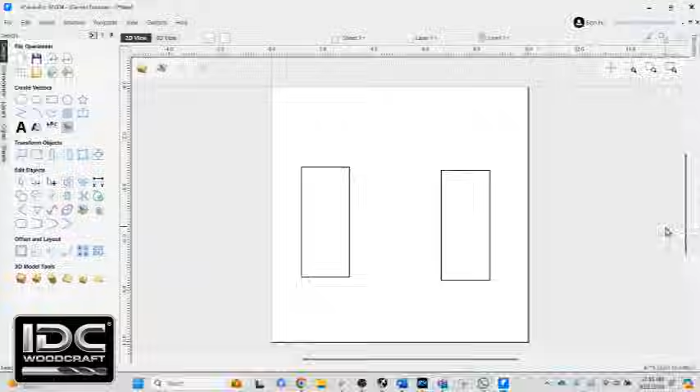So we are getting into Vcarve Pro, and you see in this project I have two rectangles. What I'm going to do is create keep-out zones, areas where the router bit needs to avoid as it moves around cutting out these projects. To set the stage, in the upper left corner is my start point - this is where the router bit home position will be when it starts, and the toolpaths will generate from there, moving down to cut this rectangle and the other rectangle.

So what I need to do is get over to the toolpath area, and the way we do that is by coming up to the upper left next to the word Design and clicking the little arrow pointing to the right. When we click that, the toolpath menu opens up.

Now what we're going to do is a simple profile cut around these rectangles. A profile cut is basically the router bit following a profile or a line. We have two rectangles, so we'll use this image here that says IDC Woodcraft - that's a rectangle, and we're telling the software to simply cut around the profile of the rectangles. So this has no keep-out zones in it.

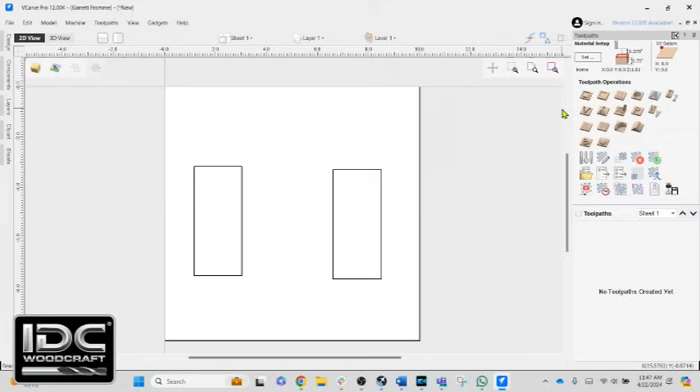Now I'm just going to start this off with a basic toolpath to help you understand how this is going to work. So we're going to go into the profile toolpath, which is right up at the top - it's the very first icon. When you hover over it, it says profile toolpath.

Select that and the menu opens up, and that's where we set up all the parameters for the profile. Up top it says start depth - we're going to start at 0, or the top of the material. The cut depth is 0.75, which is cutting all the way through.

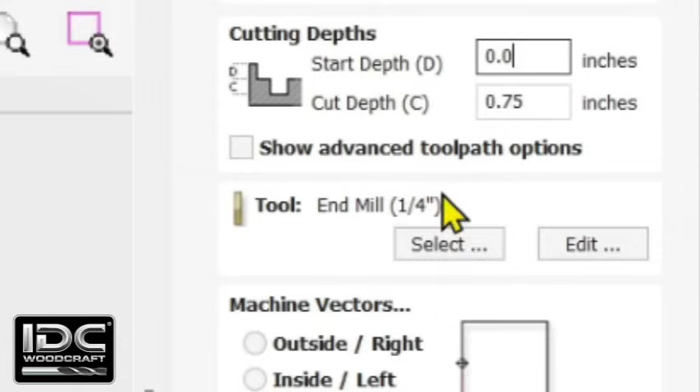Now you may have more things in this entire menu, and that would be because this checkbox says 'show advanced toolpaths.' When we click that, you'll notice more stuff shows up in the menus, but I'm going to turn that off for now just to keep this a little clean.

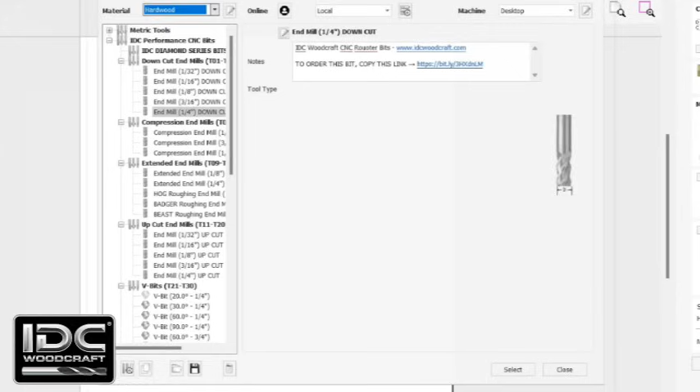Now we need to set up our router bit. We are going to go with a 1/4 inch end mill, so I don't need to add one, but if you need to add one or change it, just simply select the Select button. The tool database will open up, and then you can select your router bit.

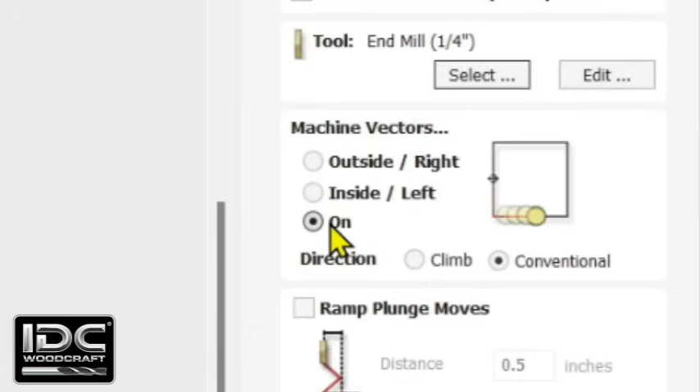So we're going to leave it just on the line, and we're not going to do any other settings. Down at the bottom it says Profile 2. Normally we would rename this toolpath, so we'll just do it because it's good to stay in the habit, to rectangles, and we'll call it the tool. So it's a down cut, 1/4 inch down cut.

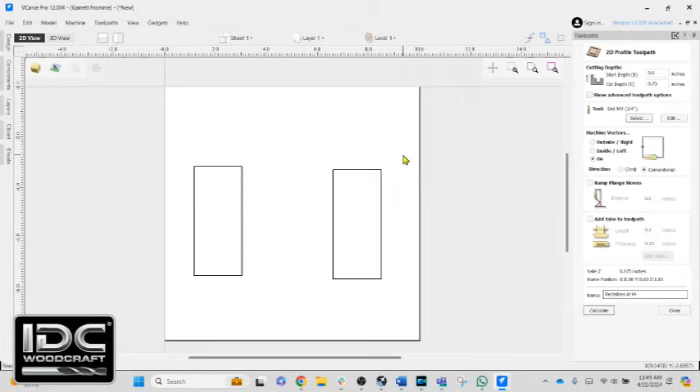And we need to select the two rectangles. So I'm going to hover up to the right somewhere, hold my left mouse button down, and select both rectangles. They are now selected, and you see these little green corners pop up.

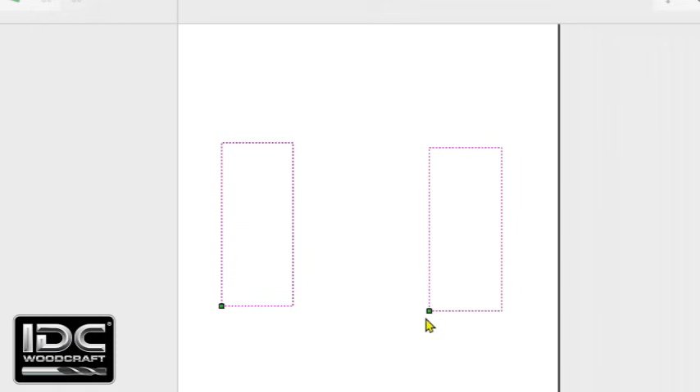These are where the router bit is going to start. So what we have at this point is my start point is at the upper left corner, and then the router bit will start from there, and it's going to draw a straight line down to this bead right here, and then it's going to make its profile cut, and then it will move over to the other bead and do its profile cut. Let's calculate.

And there we go, I'm going to reset this preview. So there's our toolpath. Now, one of the things with the Vectric software, normally in the older versions, in order to rotate this project around like this, you would hold your left mouse button down, but that no longer works. You have to do it with the right mouse button.

But here is a new feature they have added. It's this little toggle box at the upper right of the screen, where when I hover over it, the different triangles of the box turn black, indicating that's the selected zone I want to rotate to. So when I'm hovered over this particular rectangle here and I click my left mouse button, the project is going to reorient itself in the screen just like that.

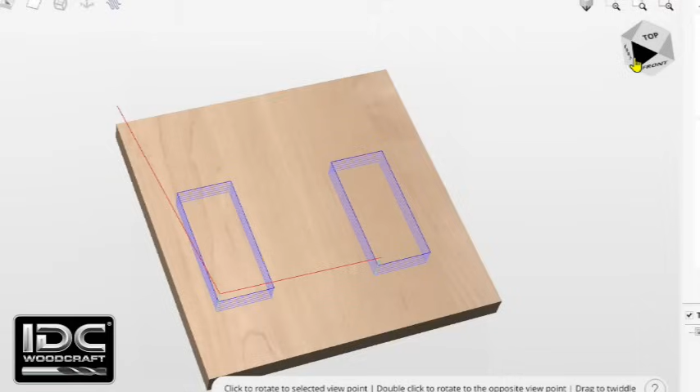Or if I click the one that says front, it'll show me the front. Or the other thing I can do is simply hold my left mouse button down and just pull on that toggle box to get whatever orientation I want. I'm going to flip back to the top by simply clicking the word top in this little toggle box, and we reorient ourselves.

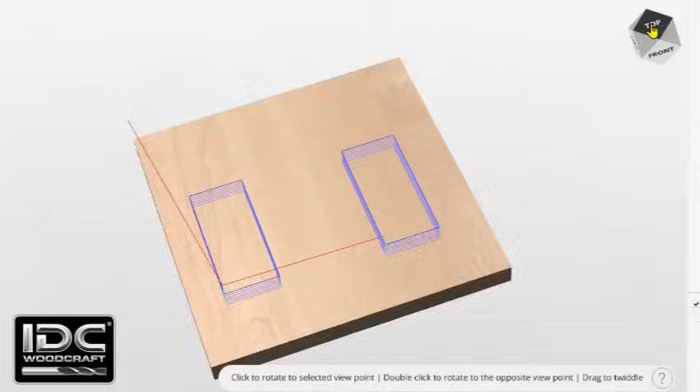Now you can see here, first of all, I'm moving this around by holding my scroll wheel down, straight down, and now I can pan around. But we can see the start point. This red line indicates the rapid motion of the router bit.

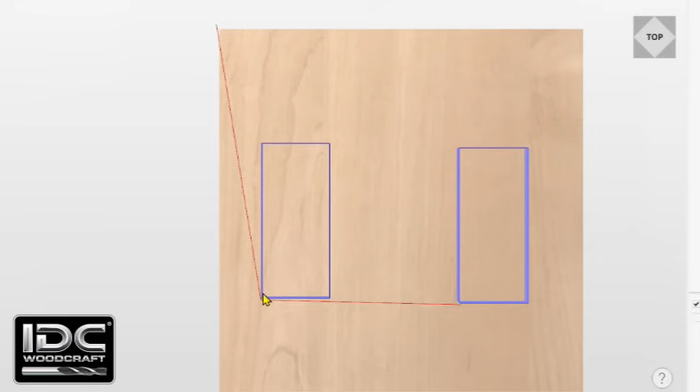So it's starting at the upper left corner of the project, and it rapids down to this lower left corner of the rectangle, and then it does all its cuts, which is all the blue lines there. And we can see it's going to make multiple cuts.

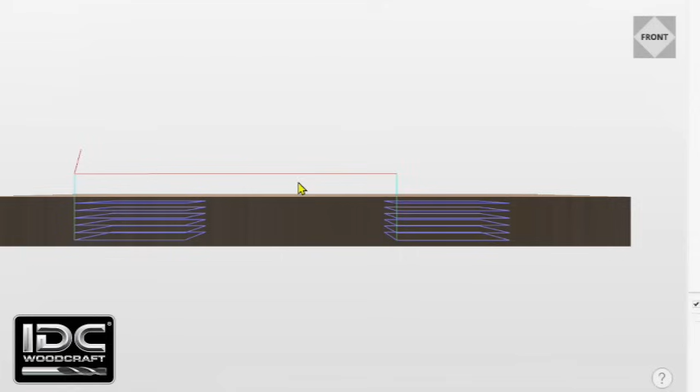I'm going to reorient this a little bit so you can see this better. And so all these blue lines are passes around that rectangle. It's going to do 6 of them, and then it will pull back out, and it's going to rapid over to the other rectangle, and cut that out.

Now you can see when I reorient to the top, it's going to go straight across. Now let's just pretend that I have some clamps in here, and I need to place them in the path of these motions, the rapid motions of this project.

Now, to be clear on what's going to happen here, you cannot put a clamp or a keep out zone in the middle of an actual carve area. So we got the profile cut around the rectangle. We can't put a clamp around that area.

That's an actual carve area, but we can put it where a rapid move is going to be, or where the red lines are going. So we're going to create some keep out zones.

Now here's one of the cool features that Vectric has added. We can actually do some editing in the 3D area instead of having to go back to 2D. Here's what I mean.

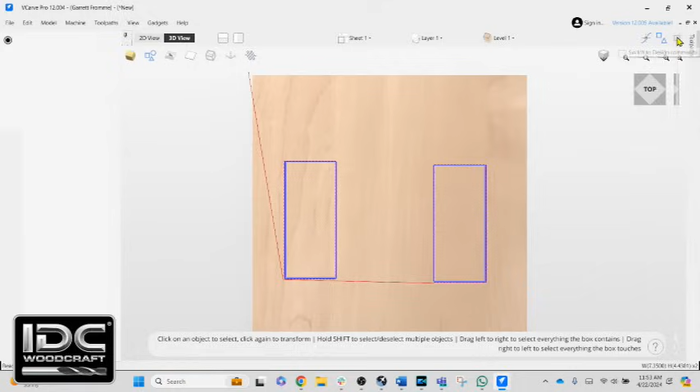First, I'm going to close this menu, and when we come up to the upper left, there's this little tab that says 3D and 2D, and 3D is highlighted black right now, which means we are on the 3D screen. If I go to 2D, we can see the 2D aspect of this screen as well. But I'm going to stay in 3D mode, and come back over the toolpaths and switch back to design. I do that by clicking this little arrow here with my left mouse button, and we get back to the design screen, but we are still looking at the 3D view of this thing.

Now let's say right in this area, right where the tool is starting to go to the first rectangle, I'm going to have a clamp there. So we're going to just create a simulated clamp. I'm going to select a rectangle and draw that rectangle. It'll just randomly draw.

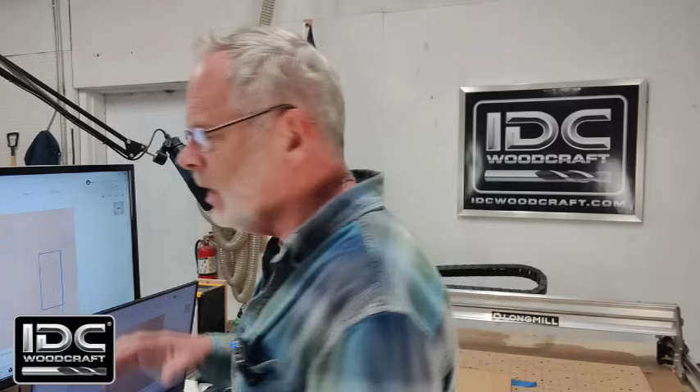Here are some new features in the Vectric software. As you can see, this rectangle has all kinds of stuff in it. I'm going to come back to this. First of all, we're just going to keep this as a keep out zone.

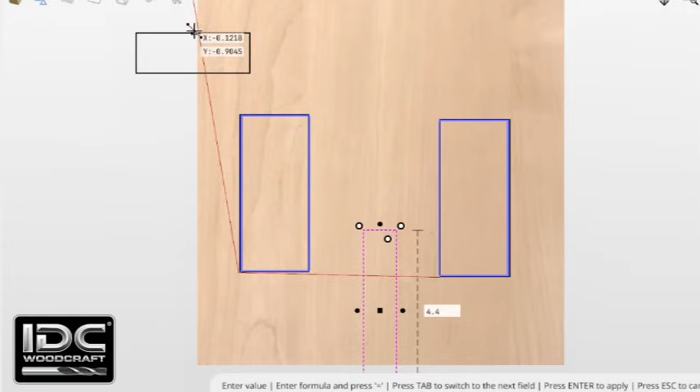Now let's say we have another rectangle or clamp right down here. So I know that in my design I'm going to be clamping the material in these areas, and these clamps are in the way of these toolpaths. You can see at the top, the red toolpath goes right through that clamp, and then when it goes across to the second one, it's going right through that one as well. So we're going to close this rectangle and switch back to toolpath.

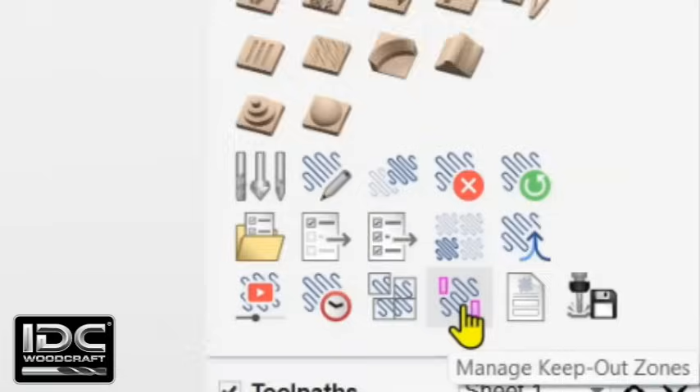Now in the Vectric software, they've added a new icon. Just to define these icons, all these brown icons are carving icons. The ones down below are management icons. We are going to go to the bottom row, the fourth one in. When you hover over it, it says Manage Keep Out Zones.

When we select that, this little menu comes up that says Manage Keep Out Zones, and we have this area that says clearance. Currently it says 0.5, but it will start out with 0, so I'm just going to leave a 0 there. And then it has two buttons, Clear Zones and Create from Selection.

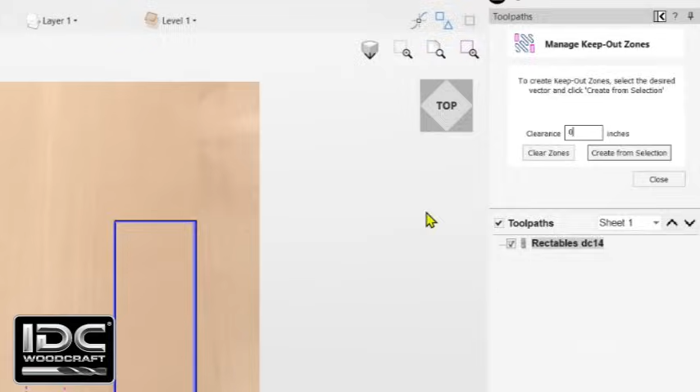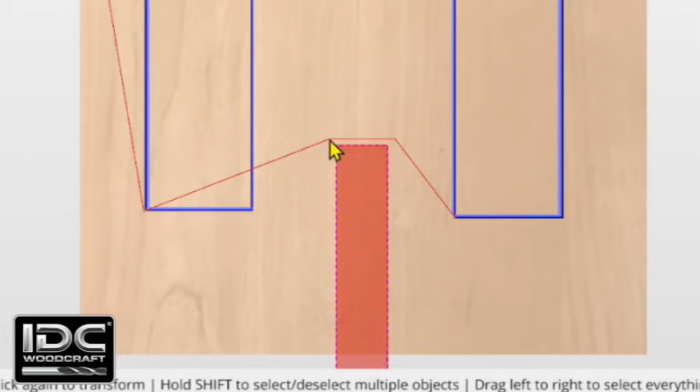So right now, if you look at the 2D drawing, there is the clamp that I created in the middle, between the first rectangle and the second rectangle. That is the selection. So when I click Create from Selection, it's going to create a red box. And you notice right away, in that red box, the toolpath that once went across to start the second rectangle has now changed its direction. It's gone above the red zone and then back down to that start point. So what this has done is immediately create this red zone where the router bit is not allowed to go, so it redirected the toolpath up and around it.

And this is how you will prevent breaking router bits. You have a clamp right there. You tell the software there's a clamp right there, and it will immediately redirect the toolpath up around it.

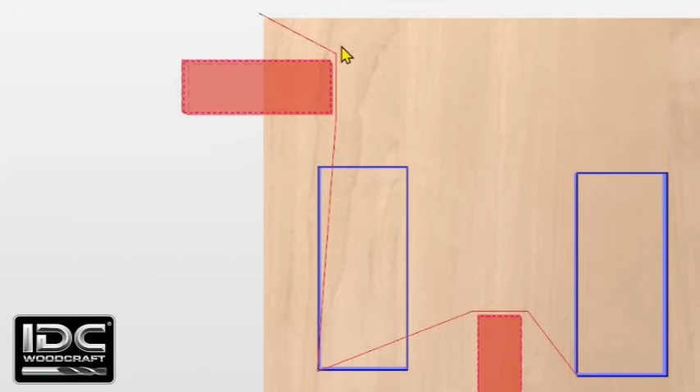So let's go back in and create a second keep out zone. I'm going to first just hold my shift button down and select the other clamp I've created that's in the way of the path going to the first rectangle, and click Create from Selection again. Created a second keep out zone. You can see the router bit has now gone around that, and then it goes down to the first rectangle. So you notice here that it comes relatively close to this keep out zone.

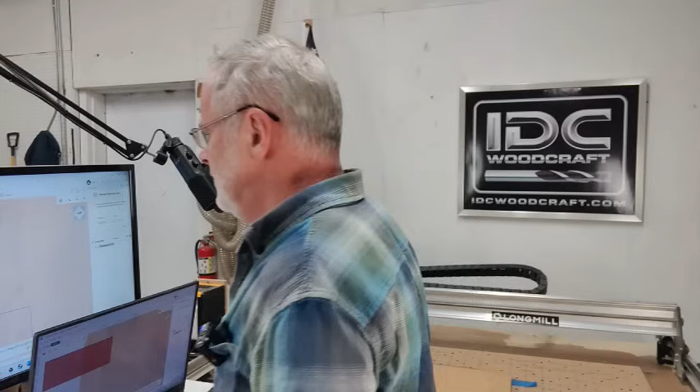Now let's say that this is the actual size of your clamp. Well, we are using a 1/4 inch router bit, and there's only a little bit of space where that red line goes around the clamp. Now, if that clamp is your physical clamp, the edge of that router bit is actually going to come right along the edge of the clamp. That red line is the center axis of your rotating tool. And then what the software is doing is taking into account half that diameter, and now it's offsetting that new toolpath by, in this case, 1/8 of an inch, which is half of a 1/4 inch tool.

But let's just say, because this is the size of my clamp, I want a little more space to come around that clamp. We can fix that real quick. This is what I mean right in this area. That distance from here to here is 1/8 of an inch.

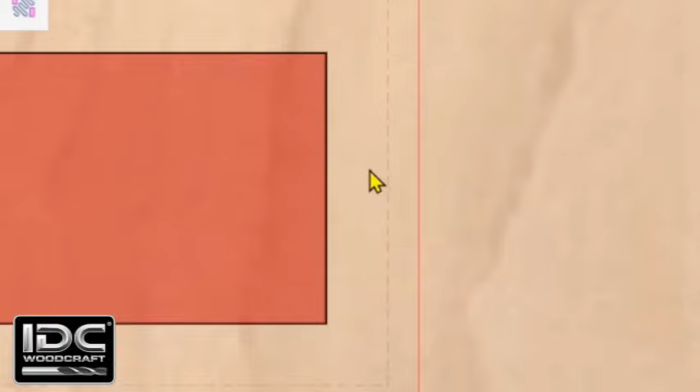So in order to get a little bit more distance around this clamp, we're going to come over to the clearance box and change that number to 0.125. What you'll see now is it has created this virtual area, the dashed line around there. That's a 0.125 inch distance right there.

It's also moved the tool path over by another 1/8, or half diameter, of the router bit. That has created a safety zone around the keep out zone, and it did the same thing on the other keep out zone. So now when I close that and generate my tool path, that's exactly what it's going to look like.

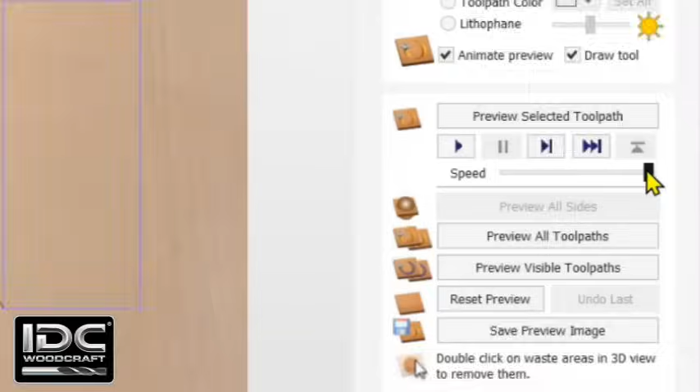So now let's regenerate the tool path, and we'll look at it by clicking this little icon with the movie image in it. It says Preview Toolpaths. Select that, and then we're going to slow the router bit way down. This little slide bar will increase or decrease the speed of the display. I'm going to show you what I mean.

We're going to click Preview Selected Toolpath. First, I'm going to get this project in the center of the screen. Click Preview Selected Toolpath, and it goes right in to start carving all this out. We can see that it is carving everything out.

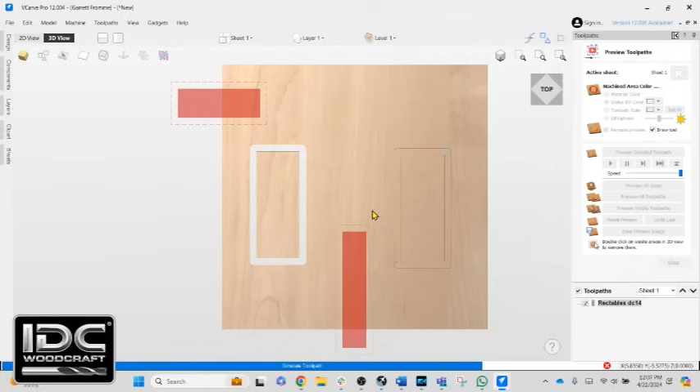Now I'm going to reorient this so we can see it a little bit better. We're going to reset the toolpath and then Preview Selected Toolpath again. And we can see the router bit running around.

Now, let's say you want to stop this regeneration because it's taking too long. Here's what you do, just a little extra tip. I'm going to reset this toolpath and set Preview Toolpath again, but first I'm going to bring the slider down so it runs a little bit slower.

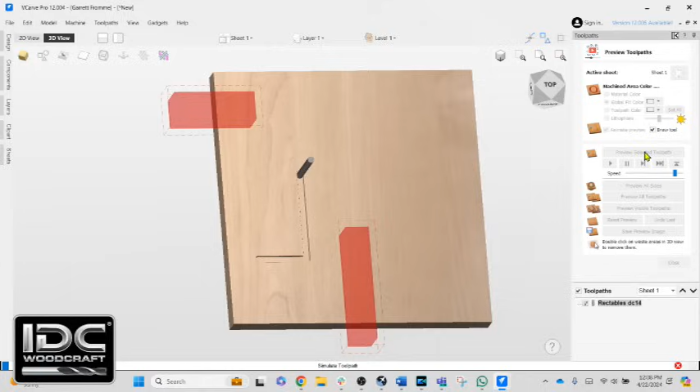Click Preview Selected Toolpath, and now the router bit is starting to run around. But let's say I just want to stop this from doing its thing. Down at the bottom, as it generates the toolpath, you'll see a blue bar expanding across the screen from left to right. If we want to stop the whole toolpath generation, there's a little red X at the right end of the screen. Click that and it'll stop the toolpath generation. So we'll click that, and it has stopped generating.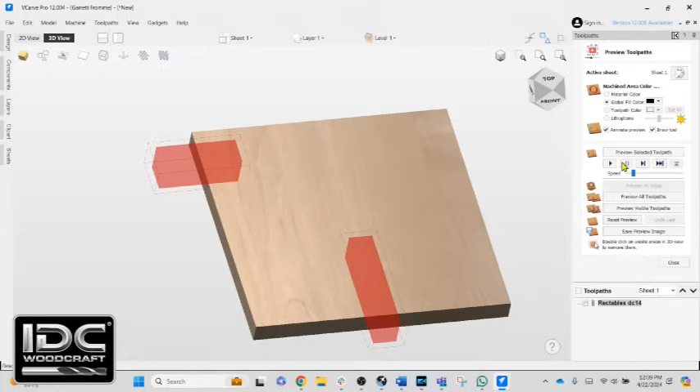So I'm going to slow this way down and see if we can actually see the router bit go around this keep out zone. Let's orient this a little bit differently, then reset, slow it way down, and click Preview Selected Toolpath. When you do a rapid, it does not actually show the rapid motion of the router bit.

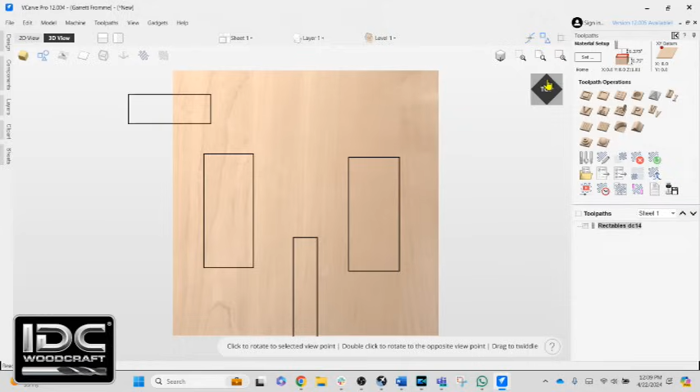So I'm going to click Stop again on this toolpath, reset the preview, and close that menu. Then reorient this to the top by clicking the little toggle box, clicking the switch on the top. So we'll click that, and there we go. Now we've got these two rectangles here, and we have our two keep out zones.

Now I've shown you all these features about the keep out tool and how to work with it, but there are limitations with it and things you can't do, and we're going to get into that in just a moment. But first I want to show you a very cool thing added to Vectric in version 12, which wasn't available in earlier versions: the ability to create your designs in the 3D modeling area and edit them. There are limitations in that as well, which I will cover. But this is a huge advance in the Vectric software, where now you can do a lot of your design work right there, generate your tool paths, modify your design, and regenerate them without having to pop back and forth between the design area and the tool path area. So we're going to get into that next.

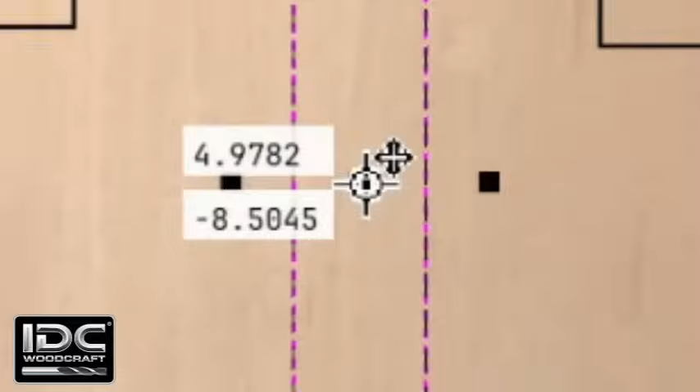Let's just say this clamp is the wrong size, this KeepOut zone, it's going to be a little bit bigger. What we can do is click right on the rectangle and click it again, and then these beads come up. Now, this is not something that was in the 3D feature in the earlier versions, 11.5 and earlier. Now, these beads enable you to make adjustments as you would normally be able to do in your 2D designs. For example, this little black bead right in the middle, you can grab that, hold your left mouse button down and move it around.

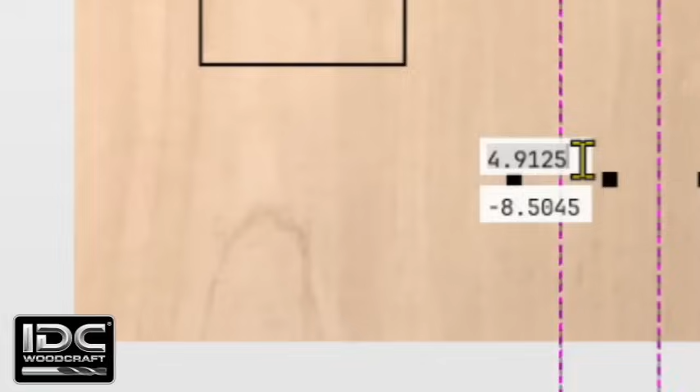Now you notice these little white boxes popped up. These are editing zones so you can change things. For example, the 4.9125, that's the X position of this rectangle from the center, from the left side of the project to the center bead. Let's say I want it at 5 inches. So I just highlight that, type in 5 and hit enter, and watch the rectangle when I hit enter, it's going to move just slightly to that 5-inch position.

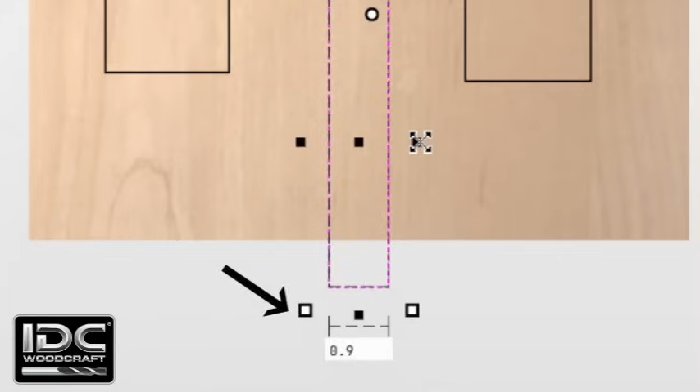So when we hover over these beads, these little windows are going to pop up. For example, the right bead, when I hover over it, you'll see the little box right down at the bottom. It says 0.9, and that's the width of that rectangle. When we click that, now we can edit that box. I'm going to change that to 1.0 to make it a 1-inch rectangle. When I hit enter, the rectangle is going to expand left to right to 1 inch. Click that, and now it's a bigger rectangle.

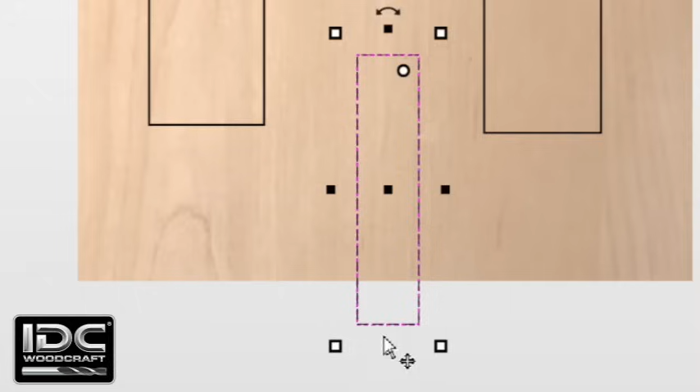And so this is another cool feature, and same thing with the dots below and above. You click that, and that's going to change the height of the rectangle. Right now it's 4.4, let's say it's going to be 5. I'm going to hit 5, hit enter, and now we have a longer rectangle.

The other cool features are this little bead, the white rectangle bead on the 4 corners. You grab that, and that's going to expand and contract in scale on your X and Y. Now, if I hold my shift button down and do that, it's going to do it from center.

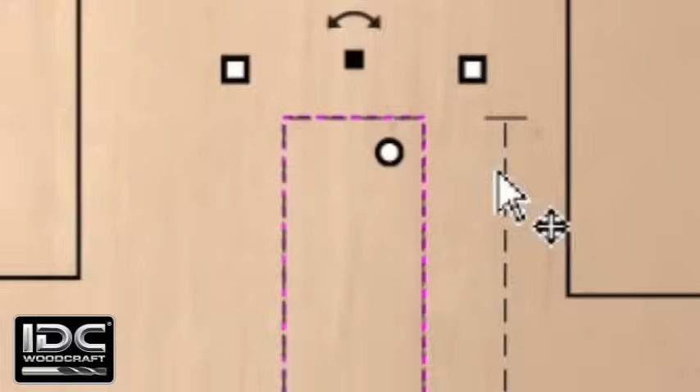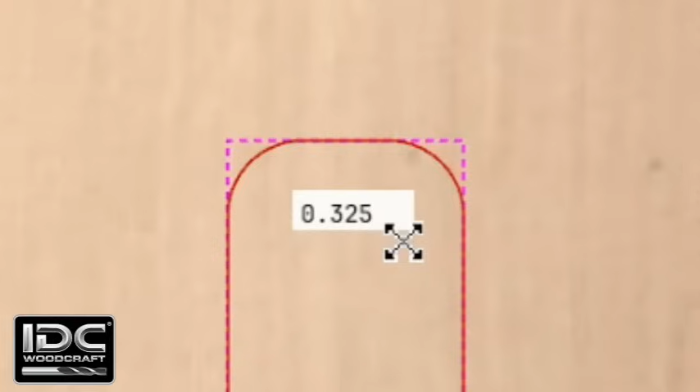Now, here's the cool feature that I really like, this little round bead. When you click that, now you have this 0 there. If I take that and hold my left mouse button down and drag it inward, now I'm creating radiuses on my rectangle. If I drag it outward, it's going to create inverted radiuses, just like that. And let's just say, oops, I didn't want that, I just wanted a square corner. I can go into that box, highlight it, hit 0, and that's going to return us to 0.

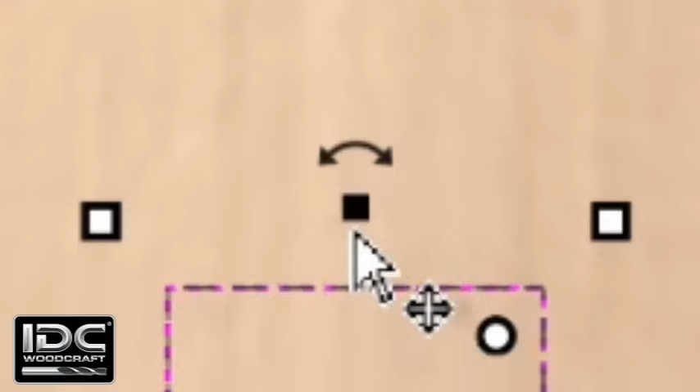And the final one is this little arc thing at the top. When you hover over that, your cursor turns into a little circle, that means I can rotate it around. I get this little box where I can change the angle of that. Let's go back to 0 - I didn't mean to move that, so I'm going to type in 0, hit enter, and now we are back to our rectangle.

Now, I want to make 2 points here. We've been altering a rectangle that we built for the KeepOut zone, but all these alterations - the radiuses, the concave corners, changing the angle, changing the size, changing the position - we can do that on any of your elements designed in the 2D side. You can do all this stuff in the 3D side for anything that you're going to be carving. So it's not just the KeepOut zones that need this edit, this is a feature you can do with any of your designs. Also, we have changed the size of the KeepOut zone - made it longer, wider, taller, changed the angle, and moved it.

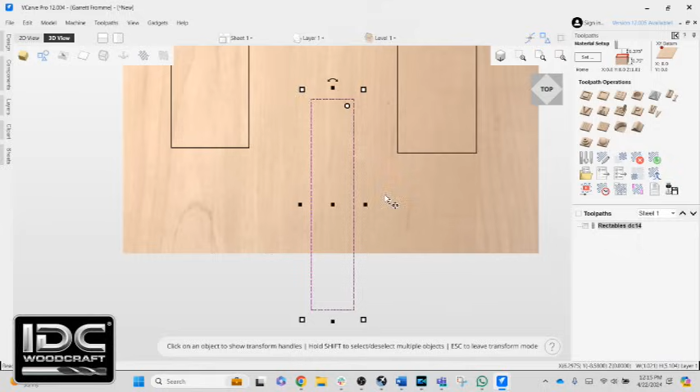We did all kinds of things. That means we have to go back into the KeepOut zone and redefine it. Here's what I mean. We are going to hit the escape button to deselect this rectangle.

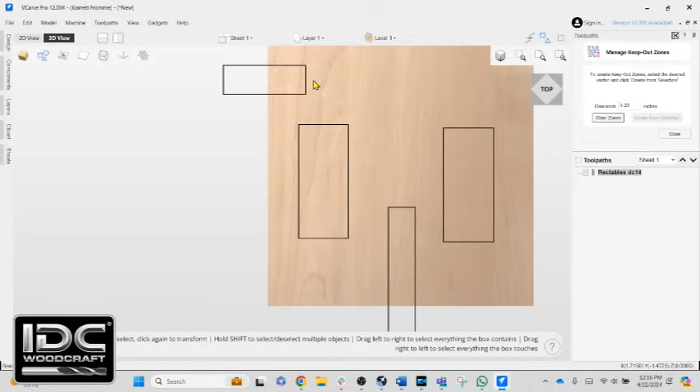We have to redefine the KeepOut zones. So we go back into KeepOut zones, and you notice now we've got this red here. That is the original rectangle size, but not the new rectangle size. What we have to do is clear the KeepOut zones and redefine them. So you hit clear zones, and then hold your shift button down if you have multiple zones, so you can select multiple ones. Then you click create from selection, and now we have new KeepOut zones. I click close, and we are ready to go.

By looking at the toolpath, we need to check the little checkbox under toolpaths next to that particular toolpath, which is rectangles, spelled 'rectables' by accident. Click the checkbox, and now you can see the router bit is going around that still.

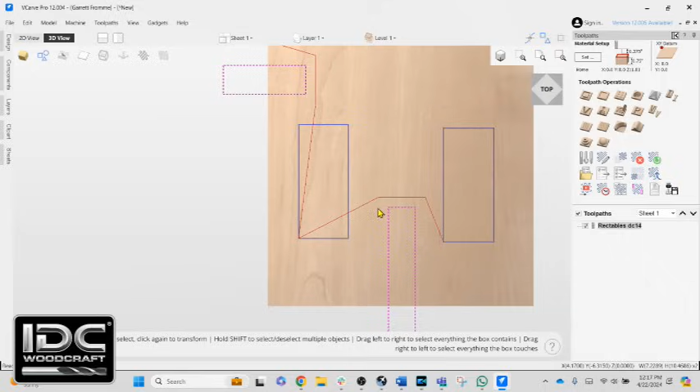Let's get into a little bit different thing about KeepOut zones. Let's say we have a screw we're using, so we want to protect around a round thing, a quarter-inch screw or whatever. I'm going to go back into the drawing tool by clicking the little arrow up in toolpath, and grab a circle, and we'll put this little circle right here so that it's in the way of the current toolpath. I'm going to close the circle command, and we'll go back to the toolpath area, and the circle is selected.

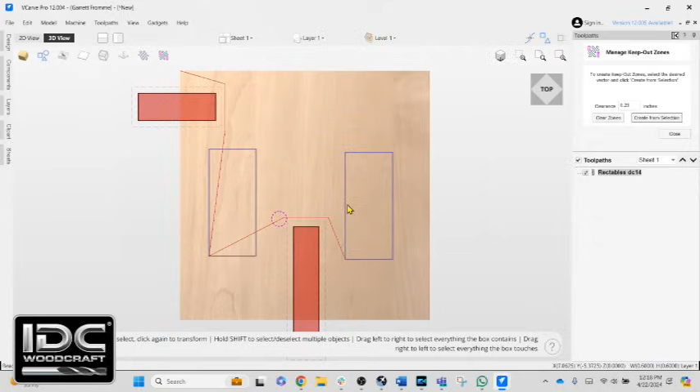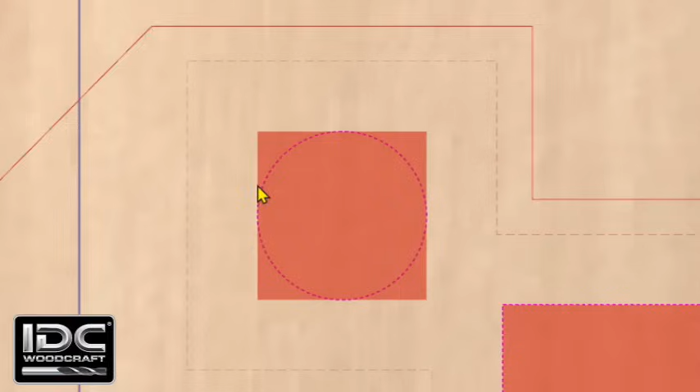We're going to go back to KeepOut zones, and deselect our KeepOut zones. No, we're going to clear the zones, and then select the rectangle, the circle, and the other rectangle, and click Create from Selection. And you notice on the circle, it is not a circle or round KeepOut zone, it's actually created a rectangle. This is the core KeepOut zone, and then it's created a rectangle around that KeepOut zone.

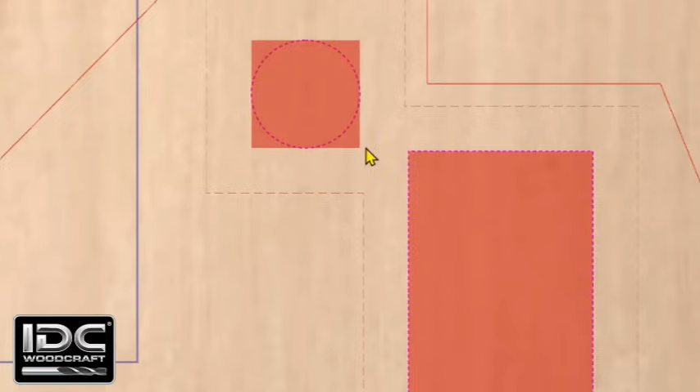But I want you to notice something else. These little red lines that are kind of hard to see, it comes around and then it goes around this other KeepOut zone. The reason this whole area is now a KeepOut zone is because up in our clearance area, we have defined 0.25. So that quarter inch on the circle goes out to this point, and the quarter inch from the rectangle goes up to here, and those two zones cross. Therefore, it's creating a KeepOut zone that is kind of odd shaped. So the router bit will work around those KeepOut zones.

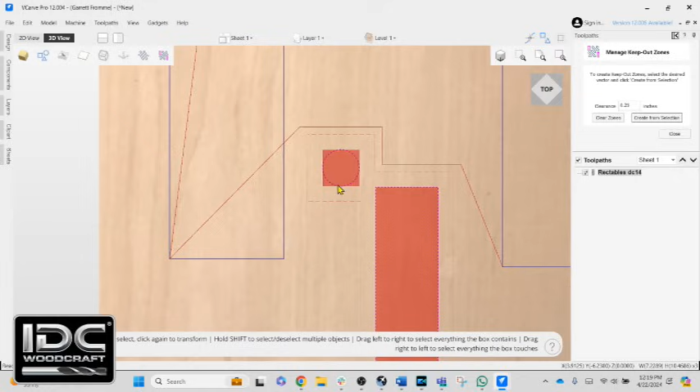So I'm going to show you one other thing. I'm going to open up a different one I've got set up, and now what I've done is set this up so that the two rectangles, this one and this one, are going to be cut, and I've created this kind of weird KeepOut zone area. I'm going to move this circle, so between the two long bars that are going up and down, the circle and the other clamp that's up in the upper corner.

One thing I've done is I've made these bars go off the project. This bar goes off the top of the project, this bar goes off the bottom of the project, and these two rectangles on the left and right are going to be what I'm going to carve, and my start point is the upper left corner.

So the router bit will now have to come around this clamp, come down, and start to cut this out, and then it's going to have to come around this circle and then come through these two KeepOut zones to get to this other clamp.

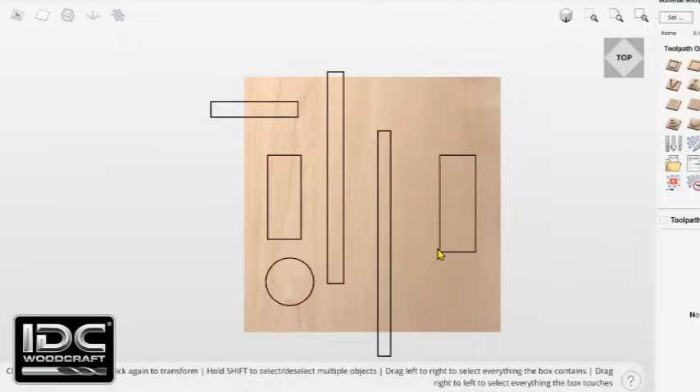So I'm going to first create my toolpath. I'm going to select rectangle 1 and hold the shift button down, select rectangle 2, and we are going to calculate this. Now we have the straight toolpath because I have not defined the KeepOut zone, so it comes straight down to the first rectangle and straight over to the second rectangle.

I'm going to close that and define my KeepOut zones by clicking Manage KeepOut Zones, and create from selection again. So we're going to do these 4 elements, create from selection, and now the router bit has to work its way all the way around all these elements in order to get it.

Now we've covered most of the KeepOut zone stuff, but there is something else you need to know about with the KeepOut zone, and that's the errors that Vectric will return to you.

Sometimes we create a KeepOut zone that the program cannot honor for various reasons, and that's what we're going to get into next. This whole idea of a KeepOut zone is where you anticipate putting screws to hold your project down or clamps so your router bit doesn't run into them. You can also use it to avoid certain areas of a carve you've already worked on, making sure the router bit will not pass through it.

It's a very cool feature, but getting to this KeepOut zone is all part of anticipating a good setup of your project. As CNC creators, we often think the carve is the most important thing we're going to get out of this, which it is, but that carve can have problems if you don't do your setup right. Actually, setup is the most important aspect of the entire process, because it prevents your project from moving and makes sure you set your XYZ 0 points, your material is set right, and you understand the material sizes relative to your design. That's why I created the CNC project setup checklist.

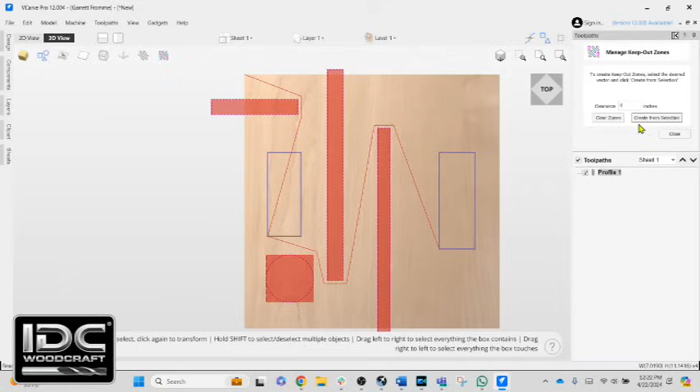All right, let's get back into the Vectric software with this keep out zone thing and talk about the errors that will be returned if keep out zones are set up wrong. Here's where the errors come up, where Vectric says you can't do this. So we're going back in, we're going to clear the keep out zones, and I'm going to take that circle and use my arrow keys to move it in the path so there's no way this router bit can go around.

The first thing to understand is what it can't do: you can't create a keep out zone where the router bit will go outside the material and come back in. For example, if this is the start point and we create a keep out zone where the router bit has to come out and around outside the material, you will get a red alert. I'm going to show that by moving this clamp so it touches this one, and here's what you're going to see — I'll click all these, and it's going to give me an alarm right away.

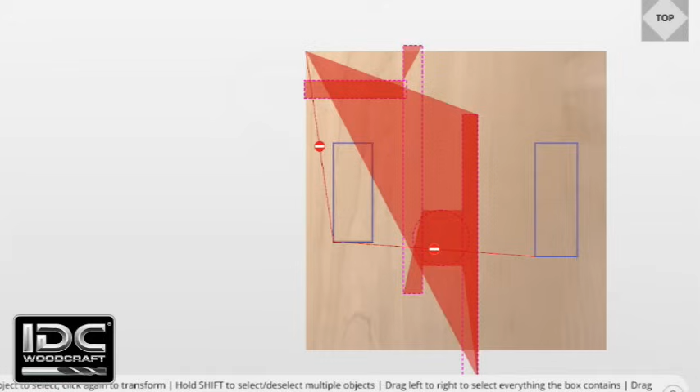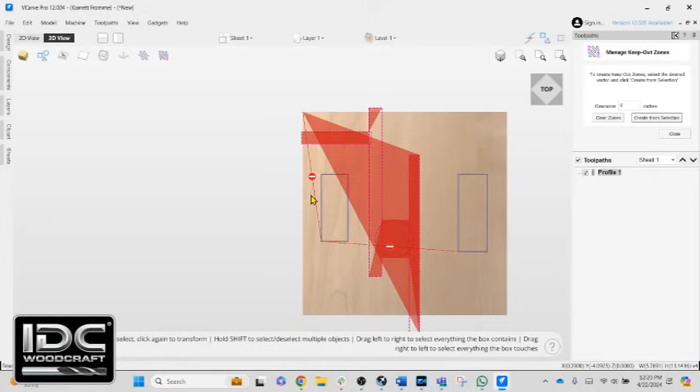I'm going to create from selection, and now it's created all these weird little shapes. These shapes are areas the router bit cannot go to, basically blocking the router bit from doing anything. So this little stop sign, or do not enter sign, shows up, meaning it will create the toolpath by basically negating the keep out zone — it just ignores them and generates the toolpath as it will. We'll close that, go into toolpath, tell it to recalculate, and it says keep out zone violation — basically, it's saying we can't follow a keep out zone that you've created.

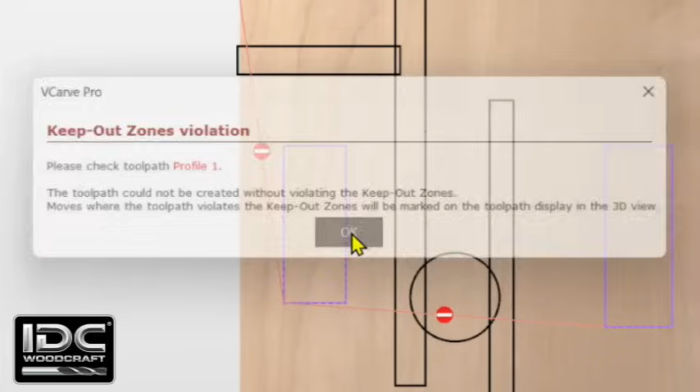I'm going to click OK, and then it says all toolpaths created successfully, and so now we have these little do-not-enter signs. If I generate this toolpath, it is going to carve out the toolpaths, but those keep-out zones are completely negated. So that's one of the things with the keep-out zones, but it's going to give you this alarm.

So we're going to clear that. We're going to come back into this keep-out zone. We're going to move this clamp back out of the way, just like that, so that the router bit can go around and go to the first project. And we're going to recalculate.

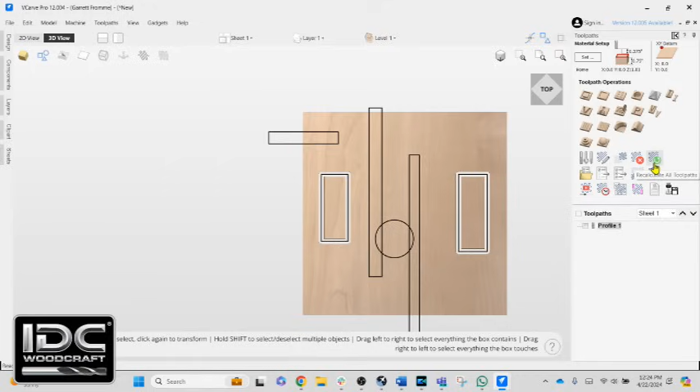So whenever you remove something or change something, you always have to recalculate. And also, if you change the size of your keep-out zones, you have to redefine your keep-out zones. So I'm going into the recalculate button, which is this zigzag button with the green turny thing, whatever you call it. Click that, and it says keep-out zone violation. Every time we are calculating and we have a violation, it's going to give us this alarm. I'm going to say OK, and then we're going to go with it. But I have to redefine my keep-out zones.

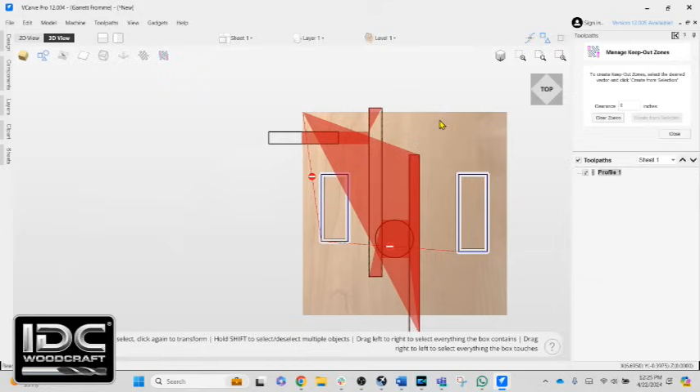So this is something I moved the rectangle, and that didn't work. So I have to clear my selection of my keep-out zones, reselect my rectangles for my keep-out zones, and then create from selection. And then we're going to close, and it's created this weird keep-out zone shape.

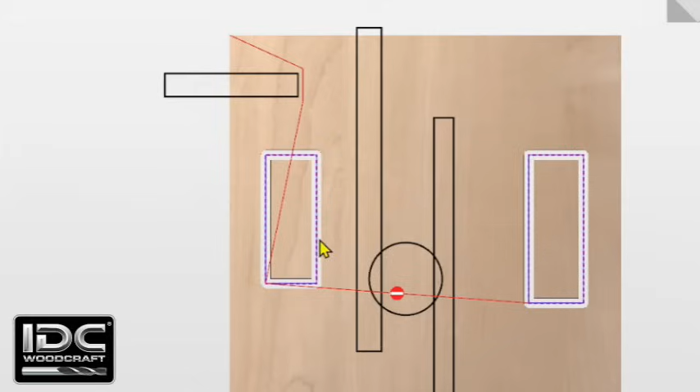Let's see if we can recalculate. It says it can't do one of them, and here's what we got. It can't honor the second keep-out zone. That's what that little red flag means. That means you have to move your keep-out zone somewhere else, but it could carve the first one because it could create a path to go through there.

Now I'm going to delete the circle. We're going to go back into keep-out zone. One more thing here, and then I'm going to cover a couple extra things that Vectric has put in here, and something you can't do that would be nice.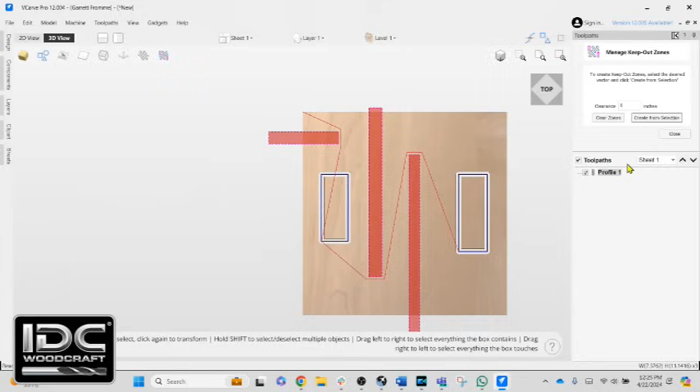We're going to clear the keep-out zones. We're going to go with these three rectangles as keep-out zones, create from selection, and you can see the router bit is now defining its path around all these zones.

Now there's something else I want to show you in this Vectric version 12 that's not related to the keep-out zone thing. It has to do with editing and designing in the 3D modeling area. Now what I mean by this is we're working in Vectric version 12. So 12 and beyond is going to give you the capability to do design work in the 3D view of your work here, where before version 12 you had to do your design work in the 2D tab and then do your toolpath generation in the 3D tab, and if you needed to make a modification then you had to go back to the 2D tab. But Vectric has actually added this really nice feature where you can do things in the 3D tab.

You can add rectangles and squares and circles, you can position them, you can draw lines, but there are some editing limitations with that where when you make a certain mistake or two, then you have to actually go back to the 2D tab to fix it. In this case, we're going to talk specifically about the trim function, where you clip lines or boxes, where boxes intersect, things like that. So we're going to get into that now.

We've been at this for about 30 minutes, so you've learned a lot, not just about the designing, but the keep-out zone and how you can manipulate your shapes in the 3D side, and you'll learn that you can actually design in the 3D side.

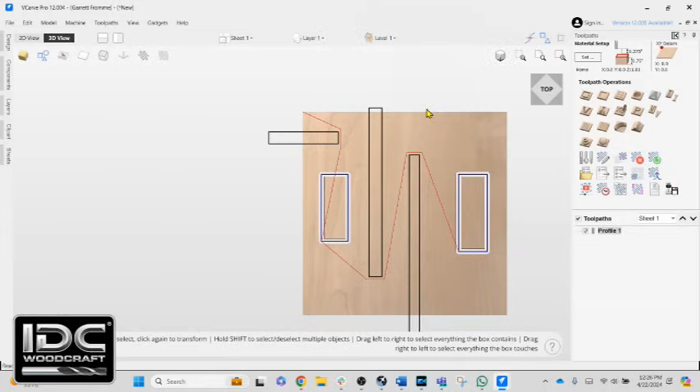All right, let's get into this other thing, this little limitation that's in version 12 that I have right now. So we are in the 3D model area, and I want to modify this rectangle here. And so what I'm going to do is draw a little rectangle that's going off of that right there. We're just going to go like that. I just want this weird shape right there for my rectangle.

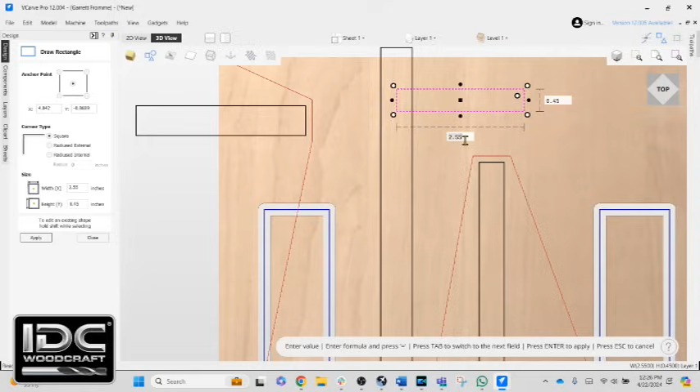Now you notice I can edit this entire rectangle as soon as I drew it, where I can do anything that I showed you before, but we're just going to run with that. I'm going to close that, and I want to try to cut with it. I want to cut this area right here. When I hit the cut function, the little scissors don't come up that enable me to cut it.

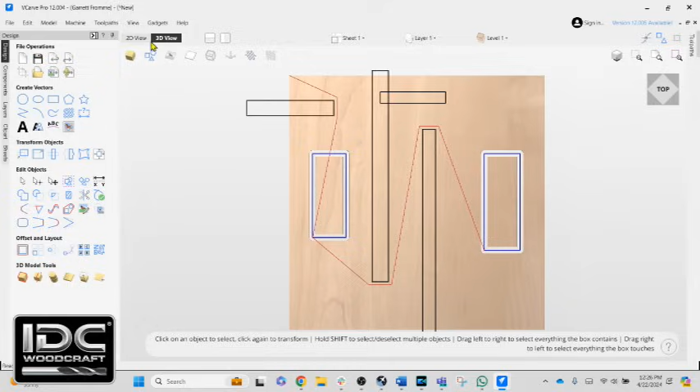So in order to modify and cut or trim, I need to make sure my toolpaths are closed. In order to trim, we have to be in the 2D view. So I'm going to come up to this tab, click 2D view, come down to the scissors, and then just trim here and trim there, and now we are in good shape, and we've created that new toolpath.

And now I have to redefine the KeepOut zone. We're going to come back in, clear those selections, click select all 3 again, create from selection, and now you see what it has done.

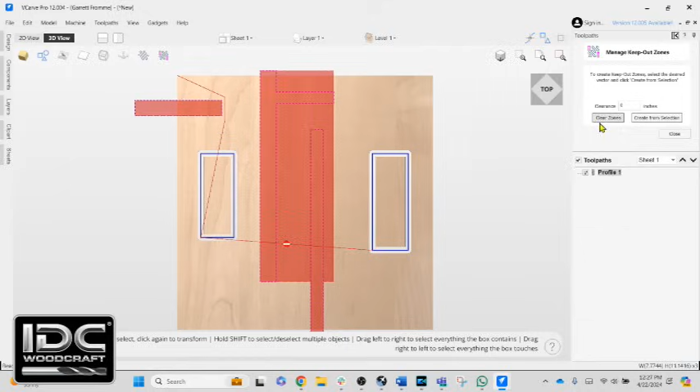So this is another interesting thing. Even though we've certainly got a clear path that that router bit can go through, we're going to go back to 3D view. It has created a KeepOut zone that we cannot get through. Why has it done this when we have a clear path that goes around this project and over that way?

It's because what Vectric does is it takes the entire shape, and no matter how it's contorted, like in this case we got this little piece like this, and what it's doing is creating a solid box all the way around it. So now it's created an area where that toolpath normally would be, and we now cannot do it.

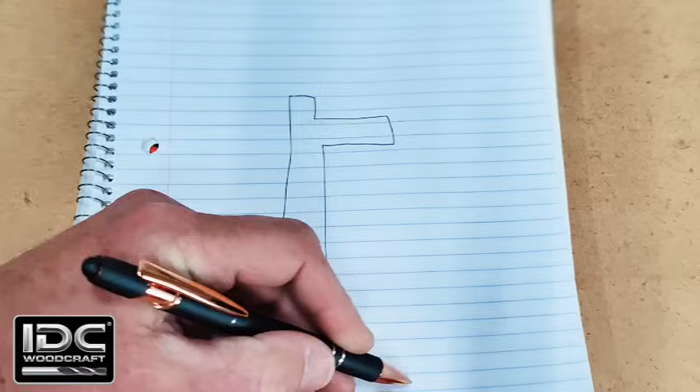I'm not sure I explained that well enough, so I'm going to explain it here. So we are going to draw that weird shape that I have in there. It's like that. And then we had another shape right there. And we're defining this shape as a KeepOut zone.

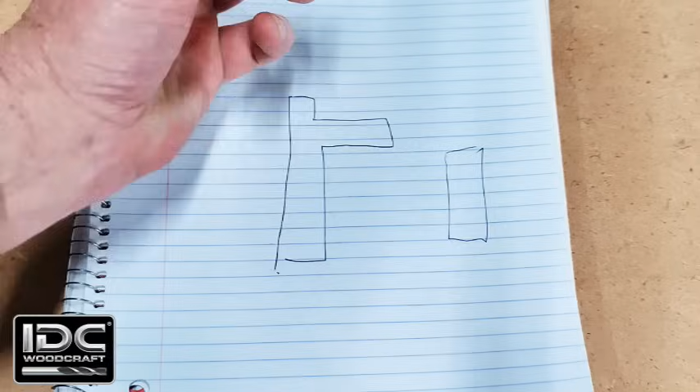Well, Vectric does not create funny shapes for KeepOut zones. It only creates rectangles for KeepOut zones. What that means is it's going to take the top area here from one corner, and go all the way across to the furthest most point of whatever KeepOut zone you've created, which is right along this edge. We're going to dot up there, and now we get that corner.

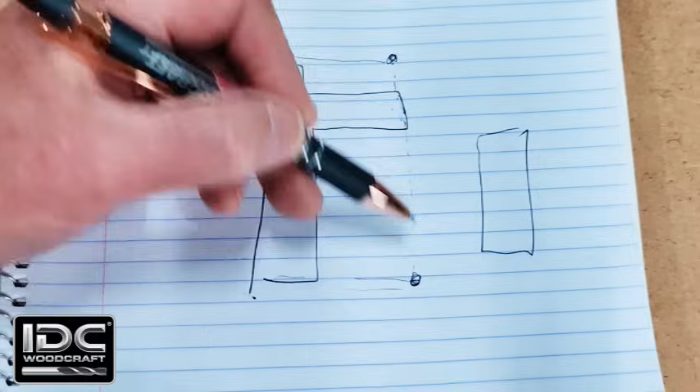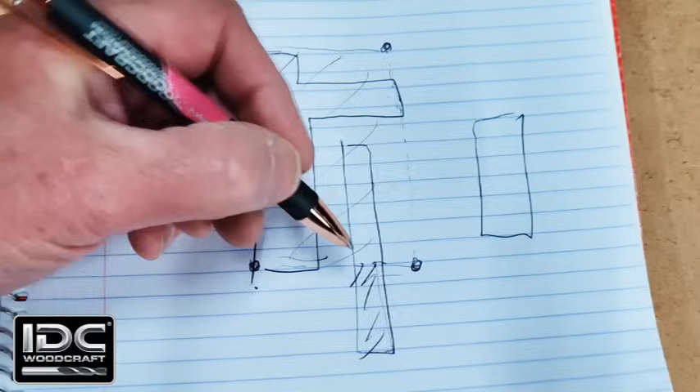And that edge, if we go down there, straight down to this edge, now it's picked that point, and of course this corner, so this entire area is a keep out zone. And now we have that other piece that is also considered a keep out zone, and it's created one in there. So basically our keep out zone goes like this, just like that.

So that is our keep out zone right there. And that's exactly why it won't let that bit go through like that, because it has created a rectangle or a box keep out zone, and that's all it can do. So that's why that is there. And we cannot run this project, at least the second rectangle, with this shape right there.

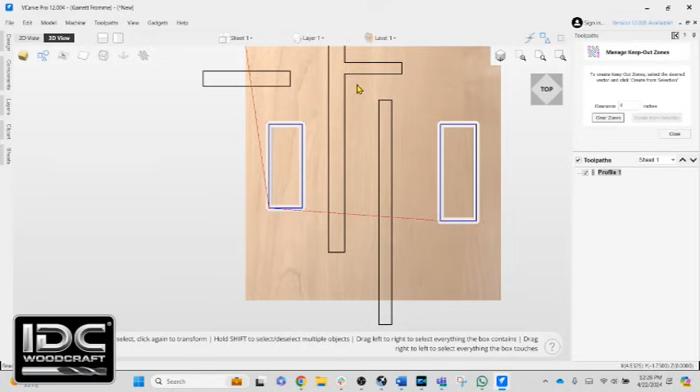So you learn that you can't use the trim feature in the 3D view, and when you're doing a keep out zone, you can't create a shape like that and expect to be able to get the router bit around there. So now you know about the keep out zone and a couple other features and some limitations.

The version 12 and higher does not run as fast right now as it did in versions 11 and below. You can't use the trim feature when you're in the 3D screen, but you can edit different things in the 3D screen, which is very, very cool. You can turn your material on and off, and you can create these keep out zones, but there are a couple limits to it. When you have different shapes and you're trying to create a keep out zone, it always creates a rectangle around the maximum size of the item that you have selected for a keep out zone.